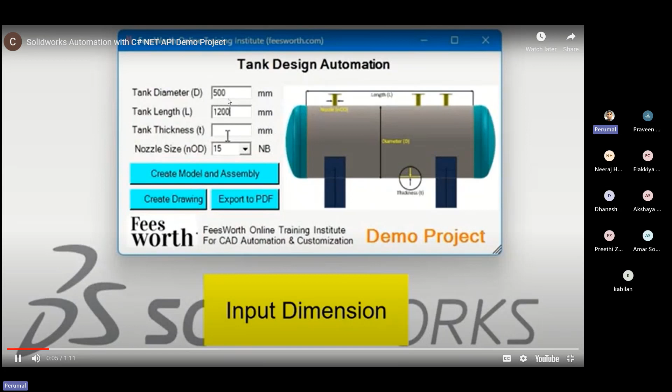Let me play this video. So I'm just giving some input now. If I click one button, whatever I told - creating sketch, part, assembly, detail drawings, PDF - this can all happen automatically. But just for demo purpose, we kept it in 3 clicks. One button will create all the parts, another will create assembly, parts and assembly, drawings, then PDF. Just for demo purpose. So let me play this video.

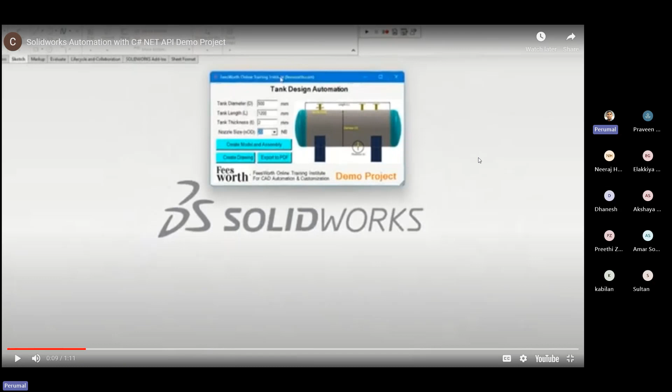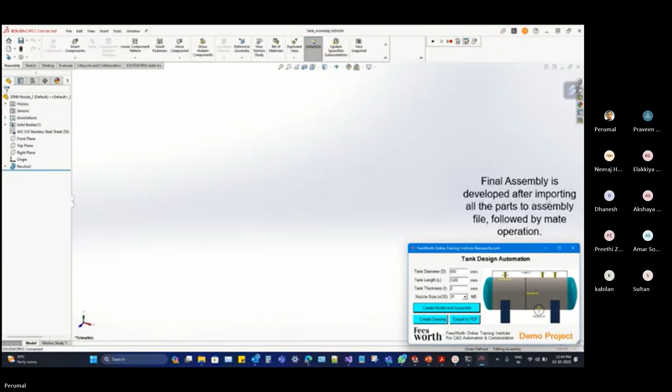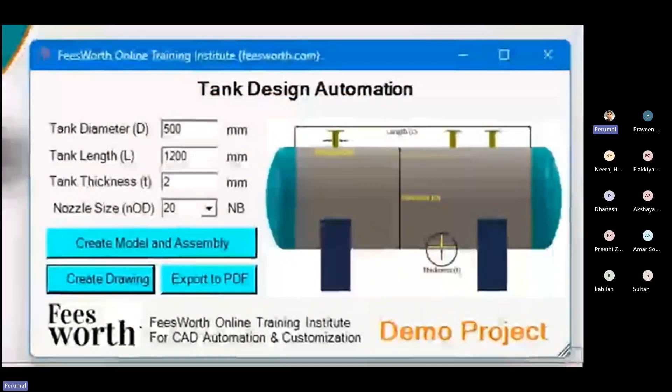So just click the button and do nothing. Everything will happen automatically because the programs are already written. So all the parts are assembled already. Now click drawing - it creates all the views in the respective place. It puts the BOQ, dimensions, and whatever info you needed. Now export to PDF. So your PDF is created.

This is what we call CAD automation, and in this case we use SolidWorks, so you can call it SolidWorks customization or SolidWorks automation. So how is this done? We use Visual Studio for software development. We use C#.NET programming language to write the program for what every step has to do. Then we used SolidWorks API, the application programming interface. Nowadays with every CAD tool there is something called API - it is already available, but we have to use it.

Once you use it, you can do something - this is just an example. You can automate something like this, anything you do in your company. In fact, right now whatever CAD engineers are doing, all those tasks can be automated - if not all, at least 90% of their work can be automated. It is not automated because people don't know. A lot of people don't know. A lot of CAD engineers are working but don't know how to automate their work.

And a lot of software developers are there, but they don't know anything about CAD. So who will automate this work? Either the software developer has to learn mechanical engineering concepts and mechanical CAD in depth, or the mechanical engineer has to learn programming concepts and automate - one of the two has to happen. Software developers already have a lot of courses to do - some Python, data science, artificial intelligence. They're confused - web application, mobile application, Android, iOS - so which course to do? They already have at least 20-30 options. Leaving everything, nobody comes to learn CATIA or NX and do programming in that. Simply, they are not coming into this field.

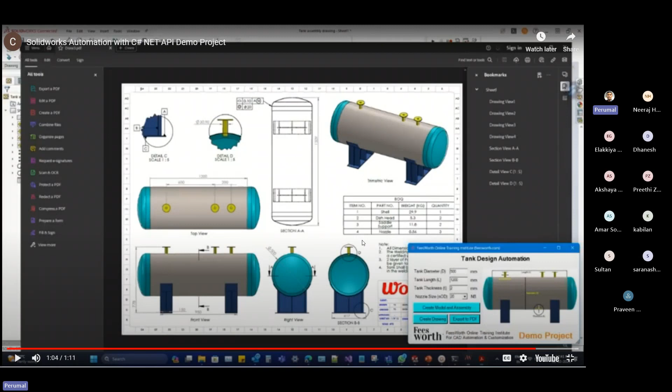But all CAD work right now, whatever CAD engineers are doing, can be automated. Some tasks can be automated 50%, some 70%, 100%. It may differ. Maybe some work needs manual interaction. But even then, if you are taking 3 months to complete it, by automating 50% you can make it in 1.5 months. So that much scope is there in this field.

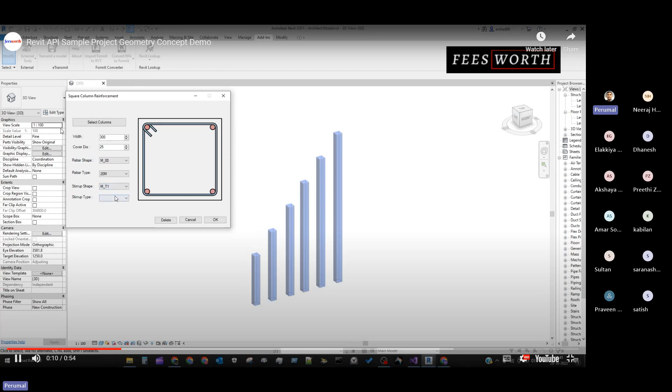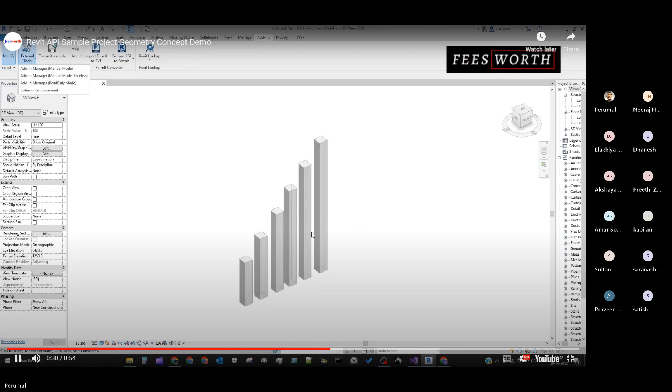Right. And you can play some other videos of what is happening. This is something in Revit. This is a customized form. You just put the input. This form is not there in default Revit. We created it, and it does a lot of changes here. You don't even realize the design has changed, that fast it is happening. So it's changed now. If you had to do it manually, bring the family or assemble it and adjust the size and properties of the block, it takes a lot of time.

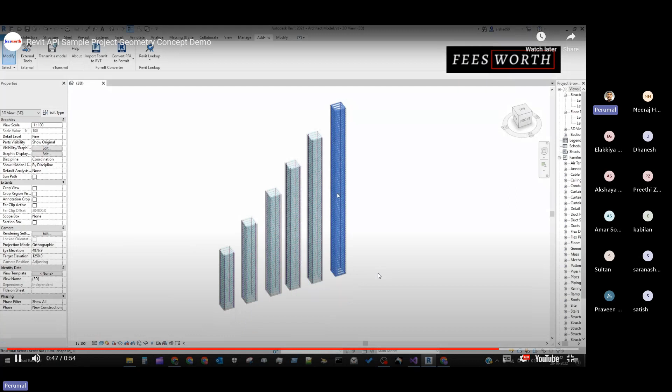So I hope you understood what CAD automation and CAD customization are. And these are all the courses we have right now: CATIA customization, NX customization, Creo customization, AutoCAD, Revit, SolidWorks, Inventor, Teamcenter, Windchill, and also Solid Edge, which we didn't put here. These are all the courses available. And how are these courses structured?

If you're interested in Creo or CATIA or Teamcenter, we teach you C++ for 1 month. Then we take you to CATIA or Creo or Teamcenter, whatever you are interested in. But if you want to do any of these other courses, first we teach you C#.NET programming for 1 month, then in the second month that specific software. Suppose you join for NX and another person joins for AutoCAD. You both will be in the same batch the first month, learning the common programming concepts. In the second month you go to different batches, and you learn how to use and implement the programming concepts from the first month in NX.

Suppose you join for NX. In this syllabus, 1 month of programming concepts includes how to run a program in the console, how to create a user form with a drop-down menu and a lot of options, how to create an exe file that you can run from the desktop, how to create a DLL file, a lot of error handling, and how to interact with Excel and Notepad programmatically. How you read data from Excel and, based on that, create something.